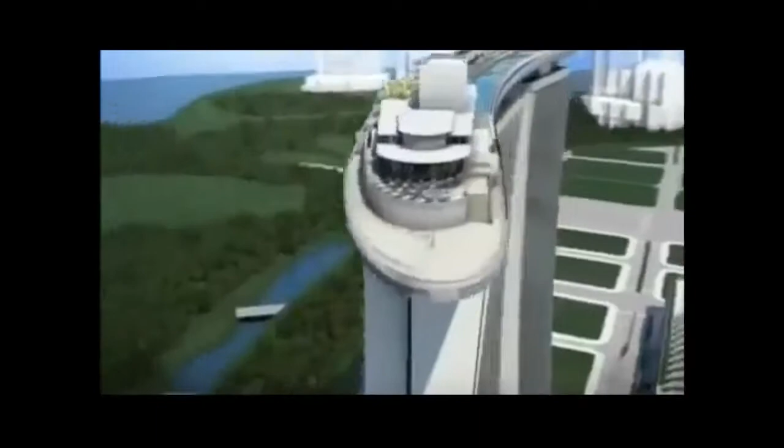Singapore's Marina Bay Sands is one of the world's most complicated construction projects. Engineers have to build not one, but 3 skyscrapers that will shoulder a sky park as big as an aircraft carrier. Worst case scenario, we get stuck. They have to devise ingenious solutions to assemble a 60-meter tall museum of impractical dimensions, install giant artworks, and erect seemingly floating pavilions for shopping and entertainment. If engineers succeed, they will create a virtual city unto itself.

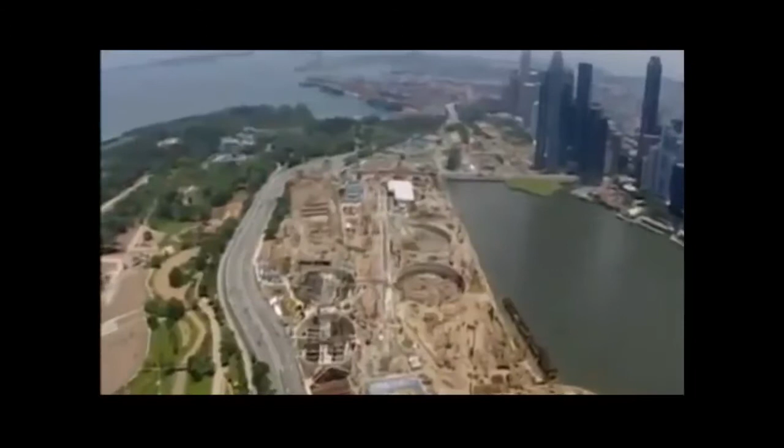Singapore, the Southeast Asian country, is smaller than New York City. The lack of space forces it to build its largest leisure and entertainment hub to date on a small tract of reclaimed waterfront land. The Marina Bay Sands. It's not one megastructure, but many.

Serious challenges lie in the array of buildings that form the unique complex. 3 55-story hotel towers slope at such great angles, they're in danger of buckling under their own weight. An even bigger problem is the hotel's roof. A 340-meter sky park spans its length, containing gardens, outdoor pools, and the world's largest cantilevered observation deck. But how do you build something as big as an aircraft carrier, 200 meters in the air?

In the hotel's atrium, mammoth works of art have to be somehow incorporated into the architecture. Its challenging centerpiece, a 15-ton mass of steel by a renegade artist from Britain.

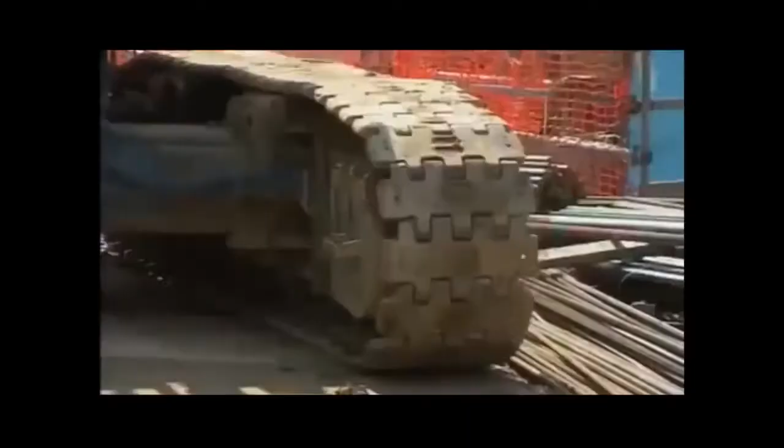A 60-meter tall art science museum is designed for maximum visual impact. It will be to Singapore what the Opera House is to Sydney. Only one problem: it seems too impractical to construct.

And a set of dramatic glass-encased pavilions, while themselves pose little challenge, have to be built in water.

The man behind the Marina Bay project understands the risks, but he believes that anything short of astounding will fail. Sheldon Adelson, one of the world's richest men and CEO of Las Vegas Sands Corporation. What we hope to accomplish is to change the face of Singapore tourism. So we expect a very successful development.

That is by far the largest and most expensive single project we've ever undertaken. It'll cost about 5 to 5.5 billion US dollars. It's a lot of money. Now, I know $1 billion doesn't buy what it used to, but by any measurement, it's a lot of money today.

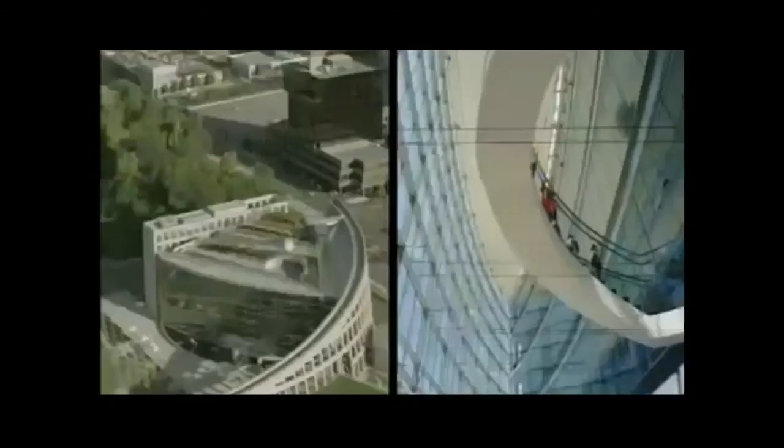Adelson believes his huge investment is safe in the hands of Moshe Safdie, a world-renowned architect. Safdie is recognized for his use of dramatic curves and geometric patterns. The Marina Bay complex will be his largest and most difficult project yet.

I think that architecture has to be timeless. Therefore, what it espouses, what it provides, needs to be something that has a long life. What's unique about Marina Bay is all the pieces coming together. You can't think about it as individual buildings. You've got to think about it as a piece of city. It's much more a symphony than it is a sonata.

On the ground, engineers are more concerned about the reality of building Safdie's vision. This is the North Retail section area. 30-year veteran John Downs is in charge of overseeing the entire project. The design is very, very diverse, and each component of the project is totally different from the others.

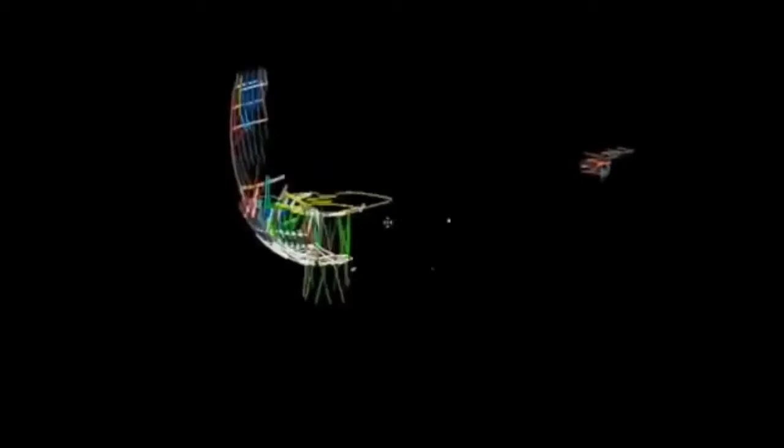For a project of this size, you'd expect with the planning, with the design, with the construction, you'd be expecting somewhere between 6 to 7 years. Here is basically a 3-year turnaround.

The first and most critical construction task is to secure the footprint, though this normally straightforward job proves otherwise, since the site was originally allocated for boats. The complex sits on 560,000 square meters of reclaimed land, part of a decade-long plan to revamp Marina Bay, a former saltwater estuary that's now a freshwater reservoir.

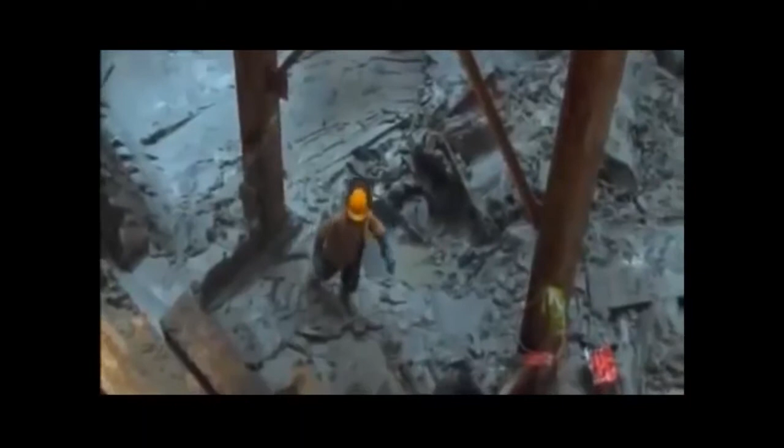Beneath the reclaimed land, which is essentially a seabed, is a dangerous layer of marine clay. Sometimes called black toothpaste, marine clay has very poor structural properties. If not given complete respect, the unstable marine clay is potentially fatal.

In 2004, Singaporeans discovered the lethal consequences firsthand. A routine excavation in an underground tunnel for the mass rapid transit network causes a collapse, creating a gaping hole in the Nicoll Highway, killing 4 workers.

The ground conditions in which they were building the Nicoll Highway were not dissimilar to those in which we are encountering here. They had also soft clay, they had similar depths of excavation between 20 and 37 meters. One of the big things that was learnt in the Nicoll Highway collapse was the importance of monitoring movements and the control of quality as the construction proceeds.

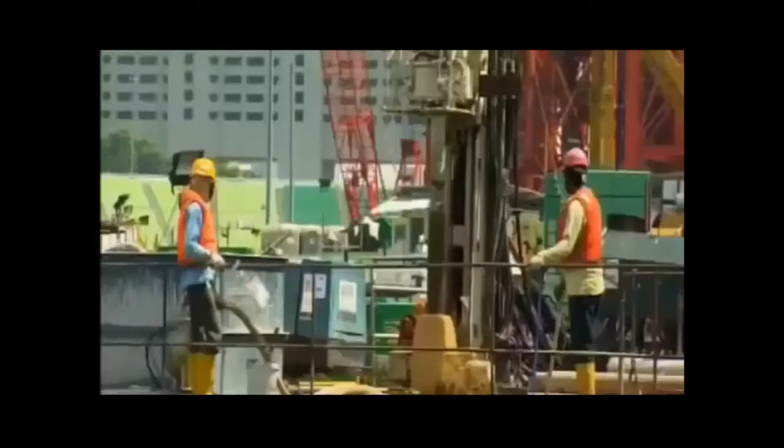Marine clay is an old foe of engineer Mike Barton. He's defeated it in the past by understanding how it behaves. The big problem with marine clay is that it is so soft that when you dig out the inside, the walls will move and potentially collapse and allow all the surrounding water in the bay into the excavation. So, before work can begin, the unstable building site needs major fortification.

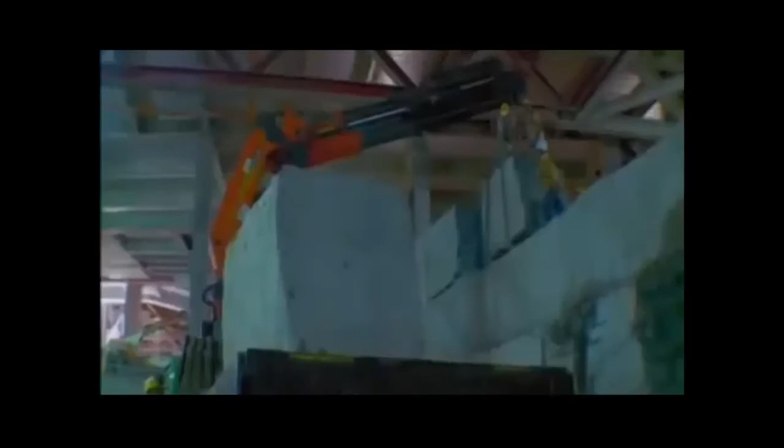To combat marine clay, engineers decide to build giant concrete walls to create stabilizing perimeters for the larger buildings, known as diaphragm walls. Up to 1.5 meters thick, diaphragm walls are steel-reinforced concrete sections, pounded 50 meters into the ground. They form watertight enclosures for men and machines to work round the clock.

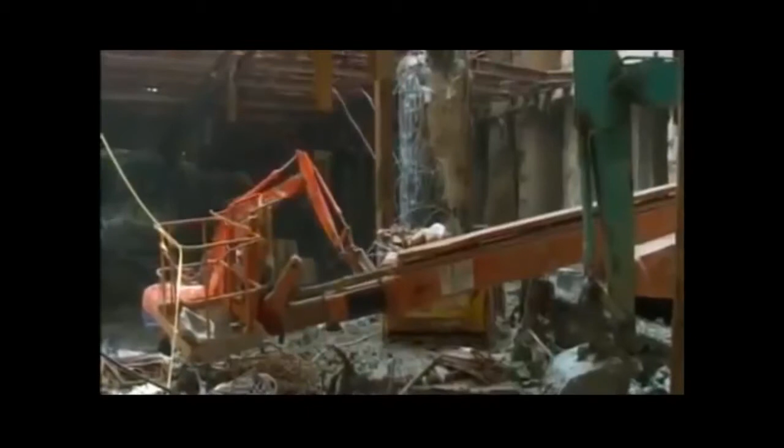In just 1 year, over 4,000 meters of diaphragm walls help produce a rock-solid foundation.

The diaphragm walls that we constructed in a formation which we called a peanut formation, which is 2 circles joined together, and a donut formation, which is circular, are able to withstand very, very large forces from the marine clay without any movement. They encapsulate an area that's bigger than a football pitch that enables us to excavate very quickly and to build structure up very quickly.

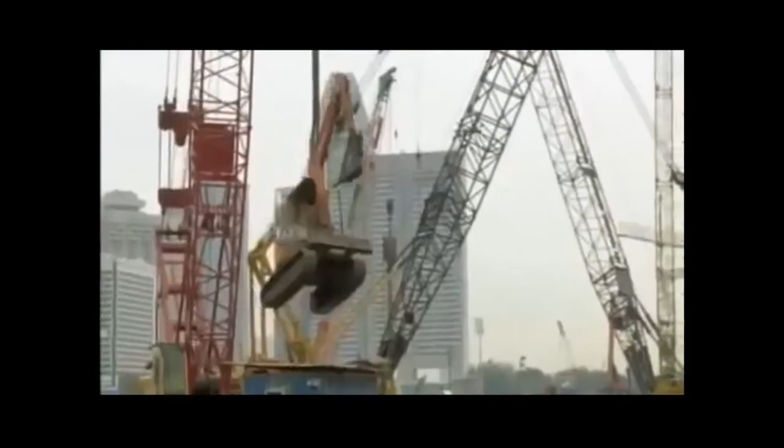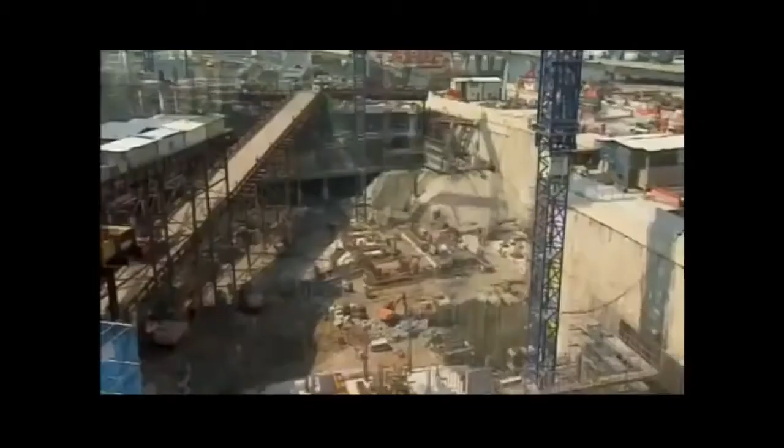Securing the footprint of the Marina Bay project has already taken a year out of John Downes' schedule. He now faces the difficult task of erecting the resort's many buildings in a space of just 2 years. Just managing the whole logistics of that, including the construction methodology, is very, very challenging for us.

To meet his tight deadline, Downes chooses the most direct solution. He hires 16,500 workers to construct every single building, simultaneously.

It's like leading a small army, so organizational excellence is key. We're just on the edge of Singapore in the CBD here. So rather than lose the contractors and the workforce to go off-site, we built our own 3-story project office. We have all of our contractors, our subcontractors here. We house our resident site staff. We have our project management team. We have our construction management team, our design management team, and the logistics here.

Come lunchtime, the monster workforce creates another massive challenge for Downes. He responds by building one of the world's largest site canteens. We've got 13, 14 different food styles here. You can see by my shape and size that I eat here every day.

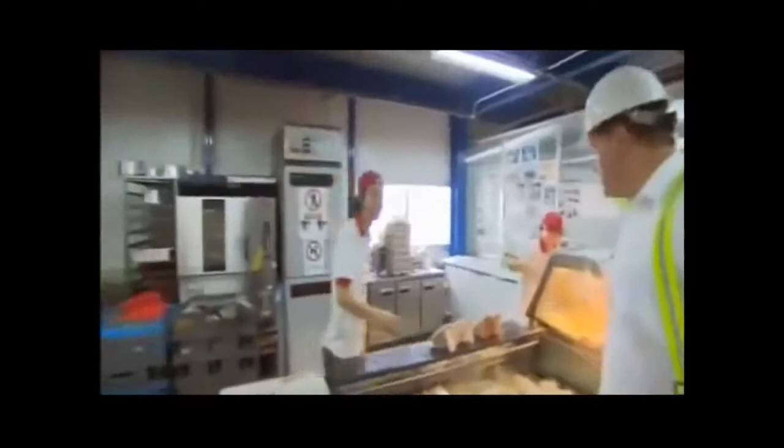I enjoy this food. So here you can see the project bakery. It has its own ovens. It's set up for breakfast. We cater for sandwiches during the course of the day. Can I take a sausage roll, please? So, freshly cooked food, straight from the oven. We stand by our products.

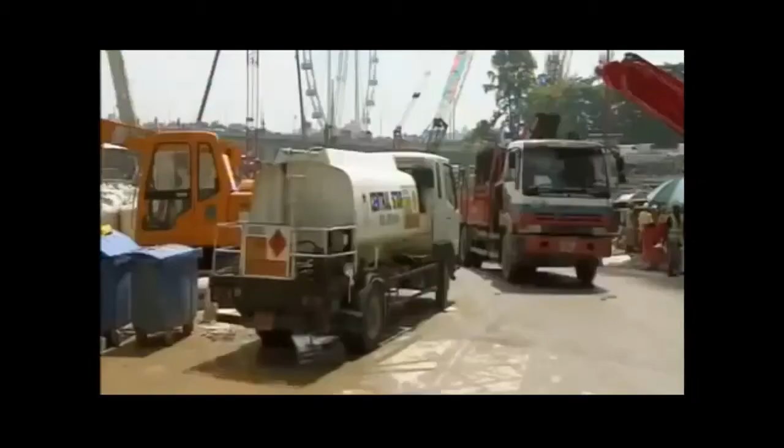The tight schedule also creates problems at the hotel towers, where engineers are already struggling with a congested site. The important thing to do is to make sure that they come in and deliver the goods straight away and then get out again. We don't want too many vehicles on site at the same time.

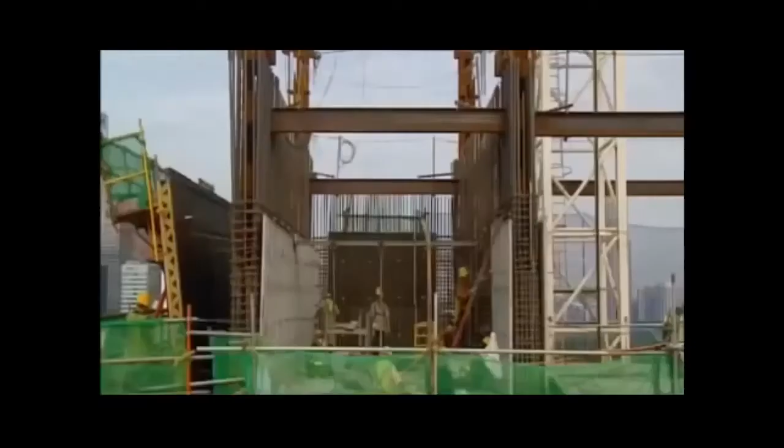To speed up construction and alleviate traffic congestion, engineers turn to a method that's proven itself countless times in the field: precast concrete. Hotel walls are made off site in the thousands. And workers laying the floors are so proficient, they produce 1 floor per 4-day cycle.

It's an impressive display for a conventional solution. But the structure they're attempting is anything but conventional. The key challenge of building the hotel towers is its unusual design. Unlike other skyscrapers, part of the towers slope at incredible inclines. Like a set of collapsing dominoes, the towers could buckle under their own weight if a practical building solution is not found.

It's a major concern for engineer Craig Glover. I've been in the industry for 25 years, done a wide range of projects in many different countries, but nothing compares to this whatsoever. There was nothing we could take reference from across the street, on the next high rise, or across town. This is a new frontier.

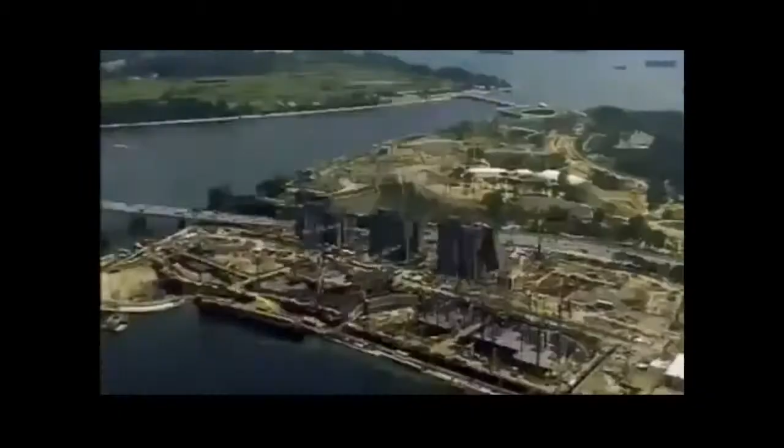Costing a staggering $5.5 billion to build, the Marina Bay Sands could be one of the world's most expensive mistakes if engineers can't solve the tower's problematic structure.

Engineer V.C. Cheong leads the design team, and their solution comes out of left field. If you look at the configuration, it's not a straight tower. It's with a sloping leg. So all this sloping leg actually is, inducing a very huge external force onto the structure. We kind of built it without any support. So we actually formulate a solution to prop up the sloping leg.

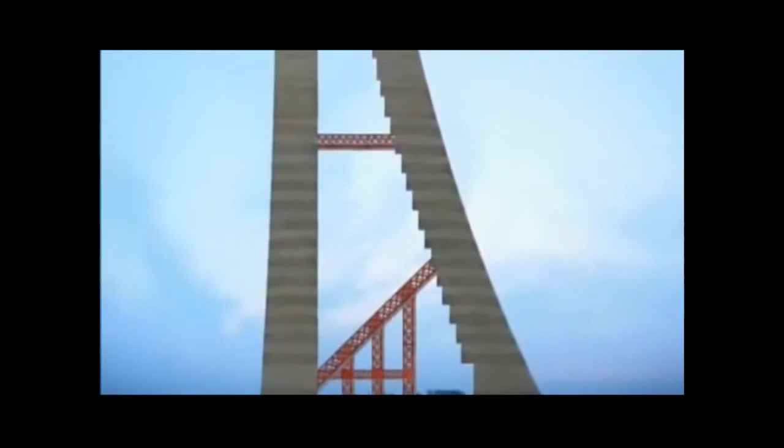Using a technique they've never employed before, engineers build large temporary struts made of strong structural steel. They prop up the sloping towers as they rise.

Like a suspension bridge, high tensile steel tendons, also known as tension cables, give an added layer of support inside the walls. In theory, both the struts and the tension cables are temporary and will be removed once giant link trusses connect the towers at the 23rd floor.

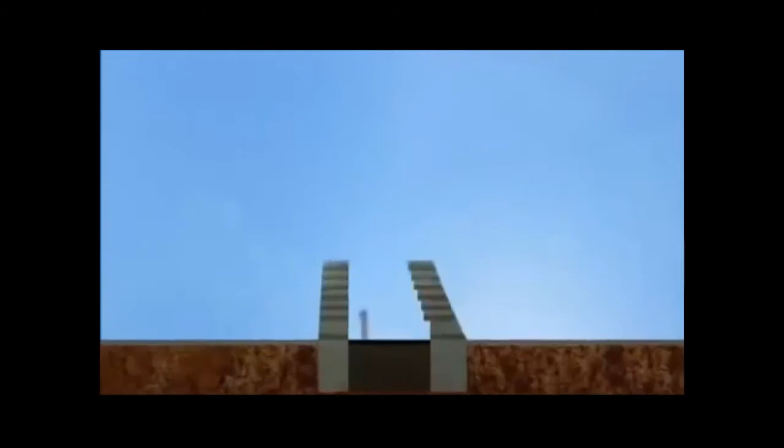The sheer weight in concrete is enough to topple the towers at level 8 if the engineer's calculations are wrong. To reduce the chances of failure, Glover and his team make a radical decision. Instead of removing the temporary tension cables in the tower walls, they make them permanent supports. I feel good it's in there because it's added strength, it's added support.

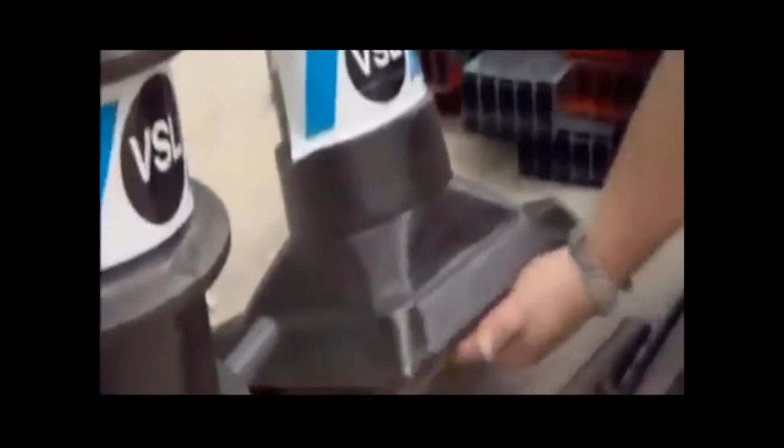We have a twined network here of high-strength steel, and what we do is we bundle these up so they form a cord with multiple strands inside this conduit. We place this conduit inside the walls prior to casting the concrete. Once the concrete is cast, we anchor one end into the concrete. We then put a very high-strength hydraulic jack onto the collar and one by one pull these strands through and tension them up. What that does is basically pull the building back and hold it in place.

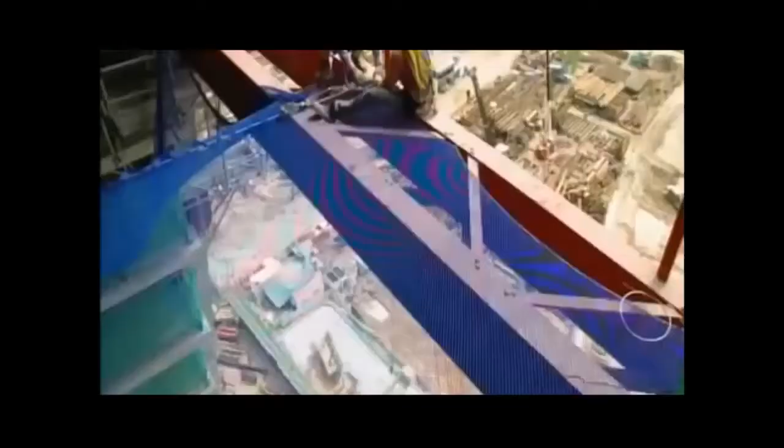If these cables were to suddenly break or if they weren't in place, we wouldn't be able to control the self-weight as we build more and more of the building up. So it's a very important part of the actual engineering of the solution to hold the building in place until we can connect it. Despite the team's quick thinking, the true test of their engineering decisions will only happen once the main support struts are removed and the massive link trusses installed.

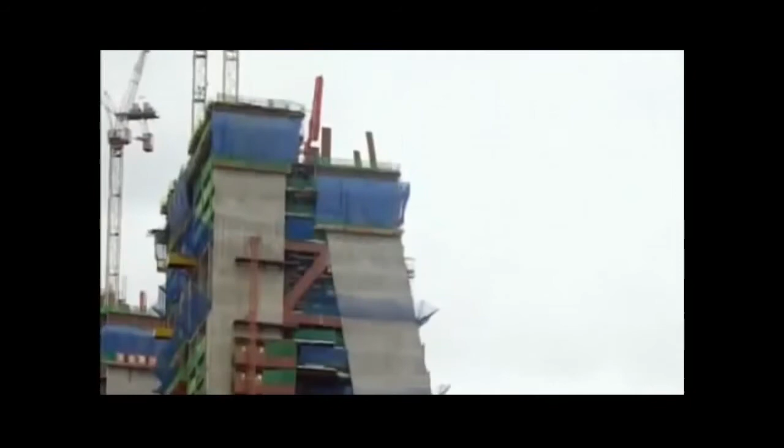Link trusses are huge reinforced steel brackets that bind the towers at the 23rd floor. Once their installation is complete, they transfer the sloping tower's weight completely away from its temporary struts. Once we're satisfied that we don't have any stability issues, then we can bring the large hydraulic cranes in and member by member start to dismantle the struts. It's got a lot of time pressure, so we've just got to make sure that these things keep moving. It's done its job holding up the building, now it's holding up the job.

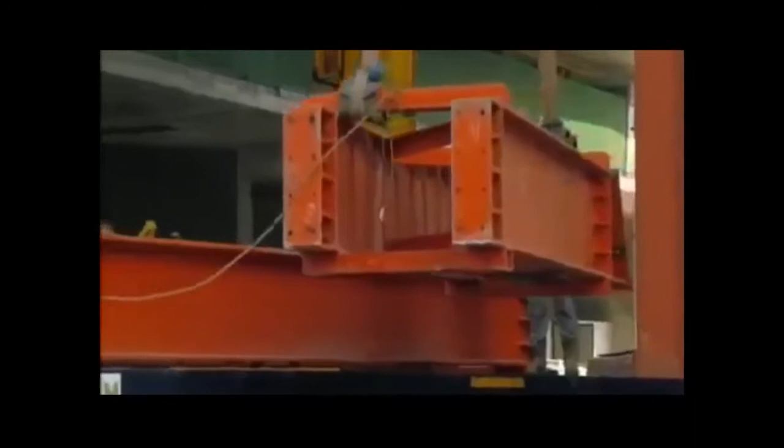As the last pieces of support struts leave the site, Glover and his team can finally breathe a sigh of relief. The link trusses are holding the building load. So far, so good. It's a lot of theory, a lot of calculations, but until you really do it and really get it out of the building, you never quite know. I'm always waiting for the phone call in the middle of the night that something's gone wrong.

Not all the structures have ended up according to plan. The 60-meter-high Art Science Museum is facing a major design overhaul. Planned as a venue for blockbuster exhibitions on the arts and sciences, its bowl-shaped roof doubles as a 3,000-seat amphitheater. Unfortunately for engineers eager to start its construction, architect Moshe Safdie isn't happy with its current shape. Somebody looked at them and said, looks like a bunch of bananas. In fact, Mr. Adelson said, looks like a bunch of bananas. I said, well, if they look like a bunch of bananas, we're not there yet. And do the structural engineers have a preference?

It's terrible news for Safdie's design team, especially its principal, Gene Dyer. There are times that Moshe will come in with an idea. We think it's quite exciting. We'll pursue the idea for weeks or even months. He'll come back and say, I want to change the idea. And we've already bought into the idea, so it's a bit frustrating.

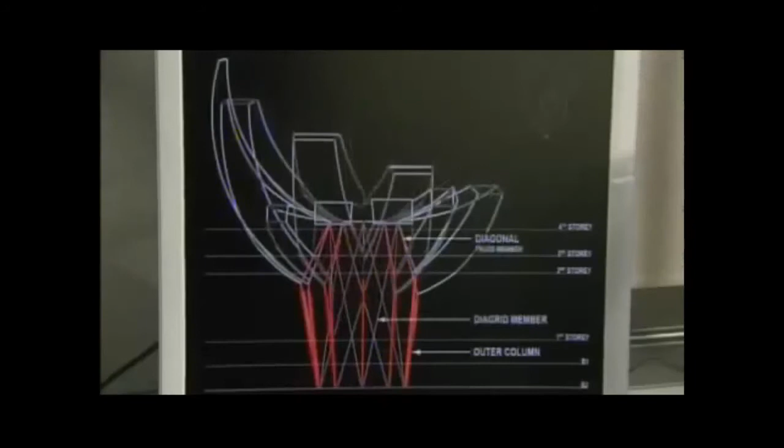To rework the unique geometry and dimensions of the Art Science Museum, Safdie and his team turned to advanced 3D modeling programs. It not only makes navigating the museum's complex geometric patterns easier, it shortens the process to a matter of days. The model is dynamic and it can be moved by just changing one or two elements. Moshe could experiment. He could make rapid judgments in a very short period of time about which way he wanted to take the project. This is a process that was impossible to do 10 years ago. Without the computer, this would take years and years.

Nautilus form effectively became... To rationalize the new look into a buildable structure, architect David Robbins splits the museum into spheroid segments. We began to look at using different spheroids to define the different upper and lower surfaces of this building. That gave us a very rational way of describing the plan form to our clients.

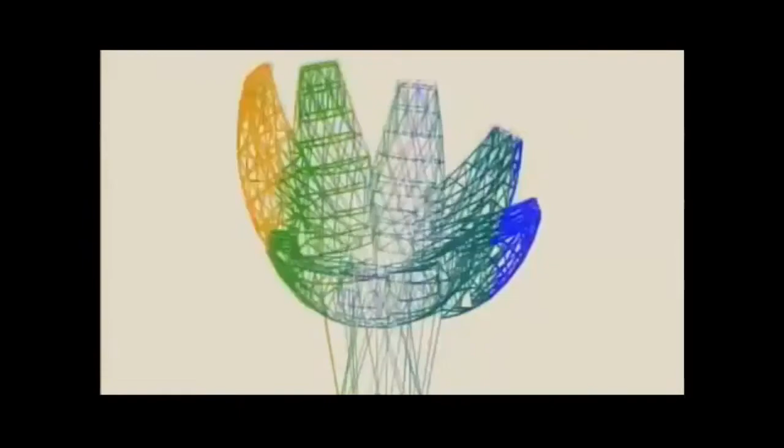After months of refining the design, Safdie is finally happy with the result. The mathematical precision that we gave them made them even more beautiful. It led some people to say, well, hand of welcome. Others said, is that a lotus? And the more ambiguous the associations, the closer I thought we were getting to our target. Because I think the least exciting buildings are those which have overt symbolic associations.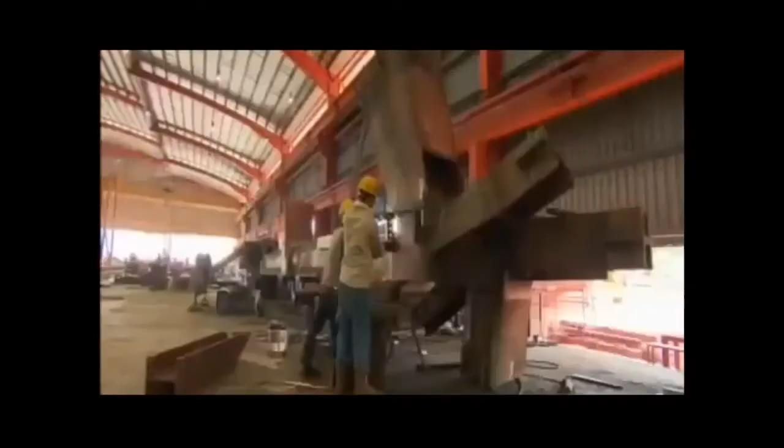Armed with the new design, engineers begin work on the museum's 60-meter-high superstructure. A staggering 5,600 steel elements, weighing some 5,200 tons, are prefabricated to exact specifications. They are then trucked onto site and assembled. It's like putting together a giant jigsaw puzzle. Each element has to be installed with pinpoint accuracy. If it's even a few millimeters off, engineers will have to start from scratch. Engineers of the massive atrium at the base of the towers are facing an equally tough construction process.

Safdie has come up with a challenging design. He wants to inject art into the atrium's architecture, so that visitors will feel like they're walking through a grand Gothic cathedral.

In medieval times, if you think of a Gothic cathedral, there's the architecture, there's the stained glass windows, there's the sculptures on the pinnacles. You cannot draw a line and say art and architecture. Art and architecture are one, they're singular experiences. And I think what we try to do here is come back to this integrative mode.

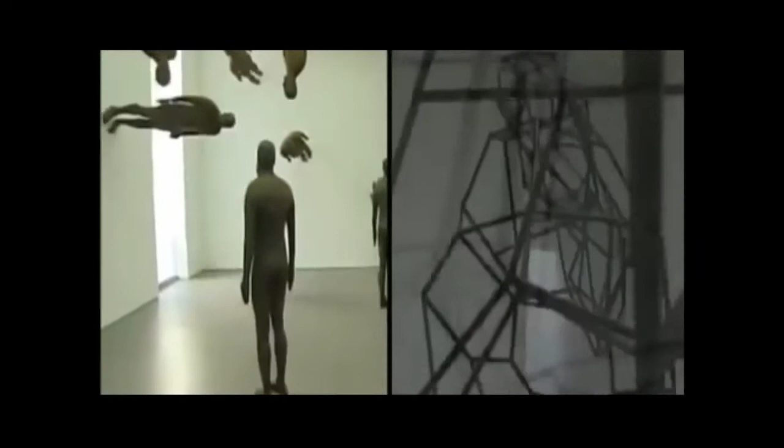To create the centerpiece of his vision for the atrium, Safdie commissions renowned British sculptor Antony Gormley. Famous for his unusual approach to art, Gormley is the brains behind the Angel of the North sculpture in northern England. What he's about to attempt is proving to be more of a construction challenge than an artistic one.

A cloud-like sculpture some 40 meters long, made up of 15 tons of high-grade stainless steel, hung 12 stories above the atrium. The Angel of the North is, in a way, making a very traditional public sculpture because it's isolated in space at the edge of a valley. You can see it for miles and miles. It's very much about occupying space.

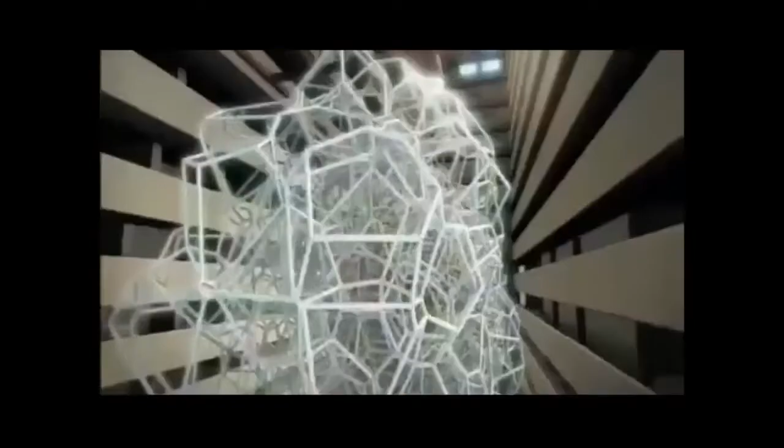This is about activating space. You can't see it for miles and miles. You have to be in the space with it. Each viewer, every person coming out of their hotel room will confront this big chaos thing and have to find their place in it. I think that's an exciting thing.

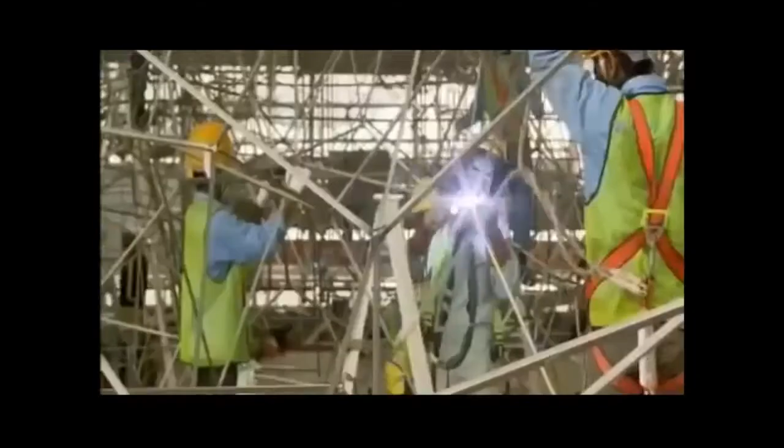Called Drift, Gormley's steel sculpture is so huge and so complex that it can't be sculpted using traditional methods. Gormley's team has to create state-of-the-art 3D computer programs that translate his ideas into buildable plans. But just as they're about to begin construction, a bombshell drops.

September 2008, a global financial crisis wreaks havoc on markets. The flow of the hundreds of millions of dollars that keep the Marina Bay project going every month suddenly stops. For engineer Matthew Pryor, it's a massive blow. I feel devastated. I mean, it couldn't be worse. Probably the worst day of my life professionally.

There's no more money coming through. So unless we put some funding in place or there's something, we're going to have to shut the jobs down. But there's a tough decision to be made, and we don't know what we're going to do just at this point in time. With the future of the multi-billion-dollar project plunged into doubt, all eyes turn to the man behind it, Sheldon Adelson. The next move of one of the world's richest men will determine the fate of the mega construction site.

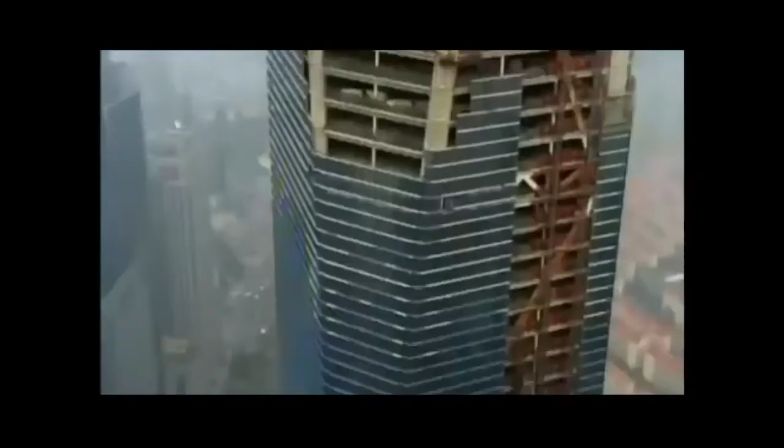The 2008 global financial meltdown is a haunting echo of the 1990s Asian crisis. Back then, progress on Shanghai's World Financial Center came to a complete halt for 5 years. For Adelson, that's simply not an option for the high-profile Marina Bay resort. His vision of changing the face of Singapore tourism is at stake. And so are billions of dollars of investment from his Las Vegas Sands Corporation.

He prefers finding a stopgap solution to weather the storm. Throughout history, there has never been a trend that went straight up, nor a trend that went straight down. So it goes up and down. It's only a matter of time when things will recover. In a bold move, Adelson pledges his vast personal wealth to the completion of the project, effectively ending any speculation of failure.

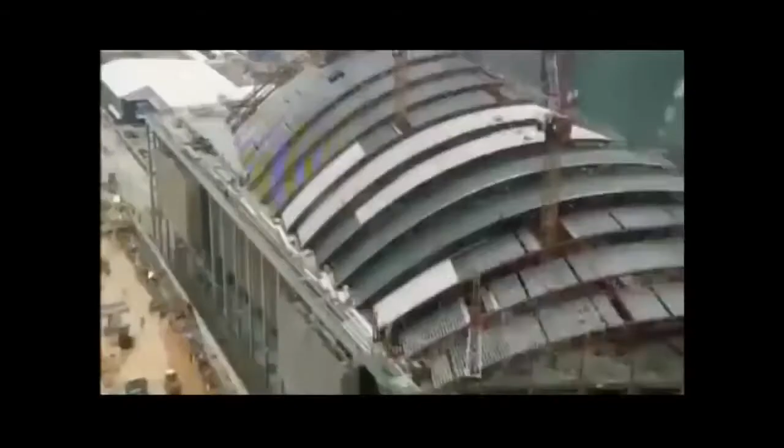There's a massive sense of relief in the company. I mean, everyone pleasantly surprised how quickly we've got through this and the fact we could hold it together and get it going again. So euphoria is probably the best way to describe it. With the crisis averted, construction on the three 55-story hotel towers, the casino, theatres and convention centre resumes at pace.

Everywhere you turn, steel is being installed. It's vital reinforcement for every concrete structure on the 15.5-hectare site. For one project at the tower's atrium, steel is more than just reinforcement. To construct the 15-ton Drift sculpture by British artist Antony Gormley, engineers had to first laboriously prefabricate it into over 70 segments.

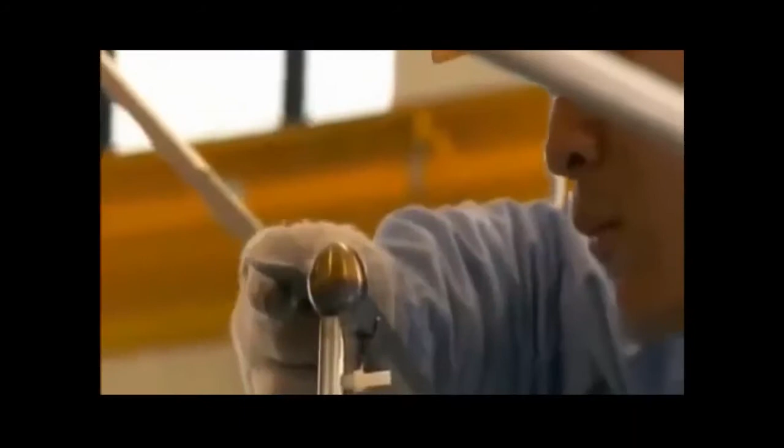The segments are then welded into 8 slices and will ultimately form the sculpture. It's a tricky operation, but engineers are able to complete it swiftly due to a system of codes and numbers that enable them to quickly identify what goes where. Once all 8 slices of Drift are fully assembled, it's lifted up into position by a temporary lifting frame. A massive box truss on the atrium ceiling then takes over the load.

In theory, the box truss will support the weight of the lifting frame as it's being lowered down. It will be a heart-stopping moment, especially for engineer Graham Stevenson. The lifting frame is about 9.5 tons, so when it picks up and gets some momentum, there's a potential that it just wants to flick over and rotate through its full 90 degrees, and we won't have it under control.

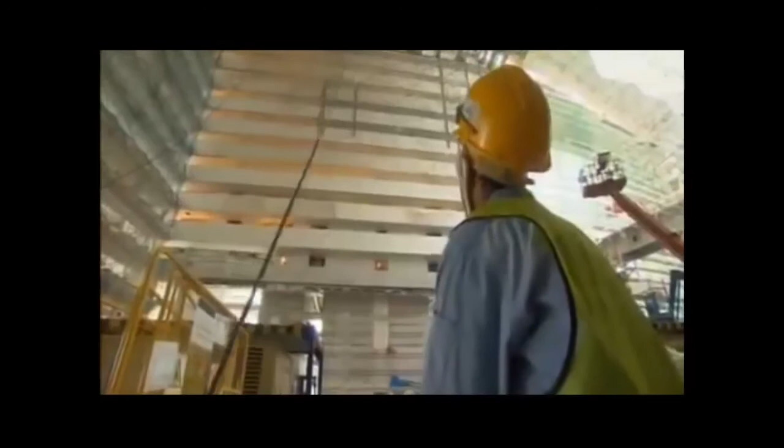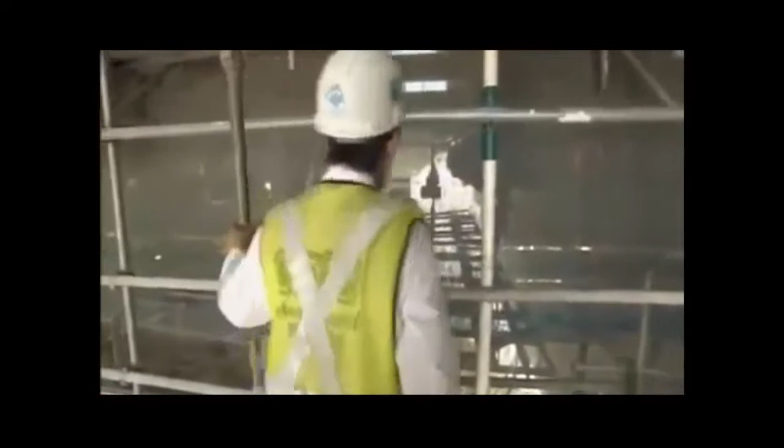Stevenson's solution: 4 powerful automated hoisting drums located at the 4 corners of the frame. They allow workers to control the strength and speed of the operation with high tensile steel cables. A spotter at the top determines the pace of the procedure and marshals the team.

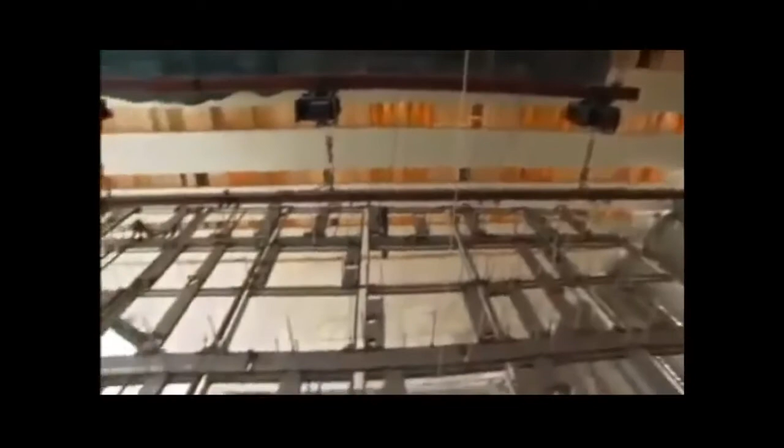With their preparations complete, it's time to face the moment of truth. Sculptor Antony Gormley is as anxious as any of the team. The entire operation is estimated to take up to 10 hours to complete. As soon as the frame is in motion, there's no turning back. Midway through the lift, Stevenson receives reports of a potential problem.

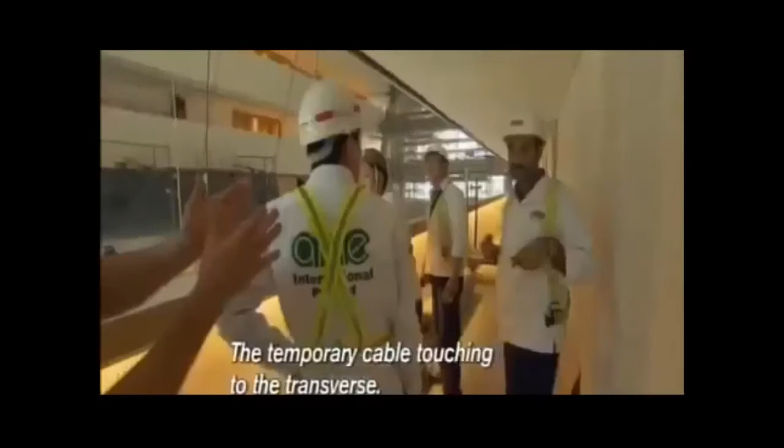22 story, number 7 temporary cable, scaffolding touching the cable. Why you got the temporary cable touching to the transverse? Yeah, but is it just the end of a tube? Yeah. So you can just cut the tube? Yeah. Problem solved.

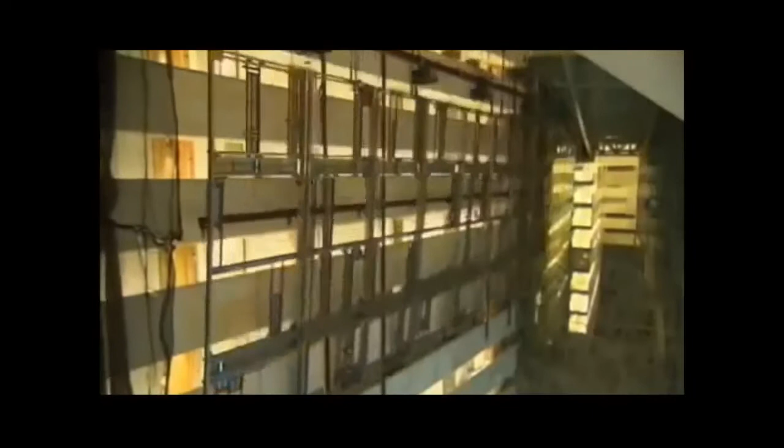But what was previously an estimated 10-hour procedure now turns out to be a 24-hour marathon lift. At 6 a.m. the following morning, they complete the job. Absolutely fantastic. The Gormley is now finally in its final position, so really an end of a long and exhausting day, and big thanks to everybody, but it's finally done.

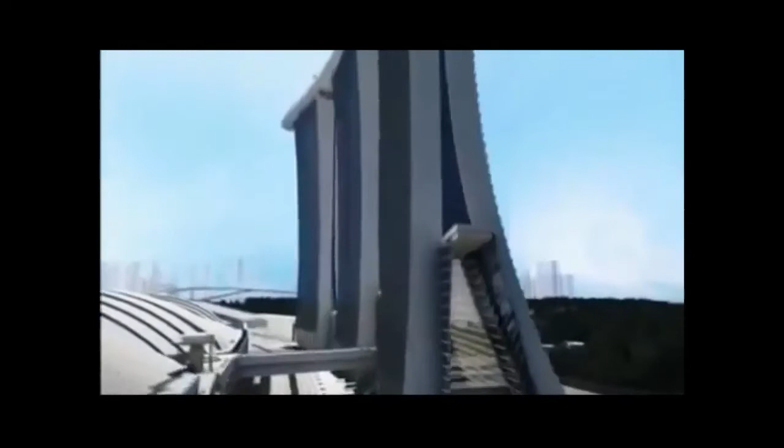While the Drift settles into its new home at the hotel atrium, elsewhere attention is focused on one of the project's key features, the Crystal Pavilions. The two glass-encased buildings by the promenade are set to be the resort's premier shopping and entertainment complexes. But before engineers can make them a reality, they have to secure their footprint. And already a major obstacle threatens to sink their objective. The Crystal Pavilions are situated within the confines of Marina Bay. So to found it, engineers have to find a way to build in 6 meters of water.

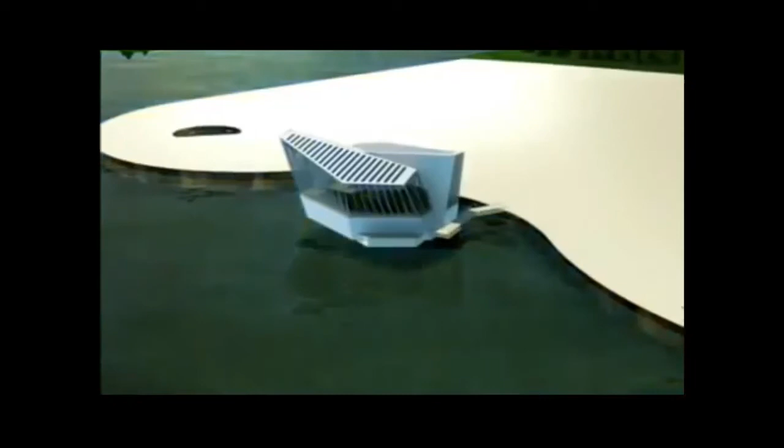The responsibility of tackling the problem falls on the shoulders of engineer Kurt Vella. I'm from Sydney. The underlying foundation in Sydney is sandstone, it's rock. All you need to do is just dust off the surface and you can build skyscrapers on it. Here it's very different. All the structures have to be heavily founded.

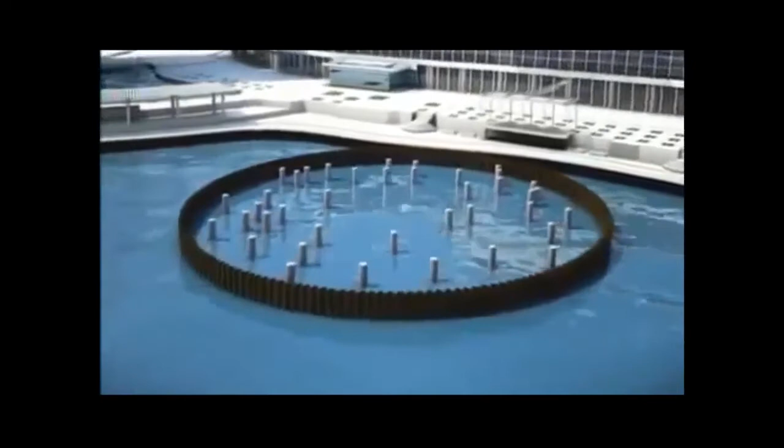To keep water out of the construction site, only one solution seems viable for Vella and his team. A waterproof steel structure called a cofferdam. This temporary formation surrounds the worksite with a circle of steel sheet piles, creating an impenetrable shield that locks out the water, keeping the workers safe within. For the job, they rope in a 12-ton vibro hammer. It punches the sheet piles deep into the earth, making the cofferdam rock solid and resistant to movement.

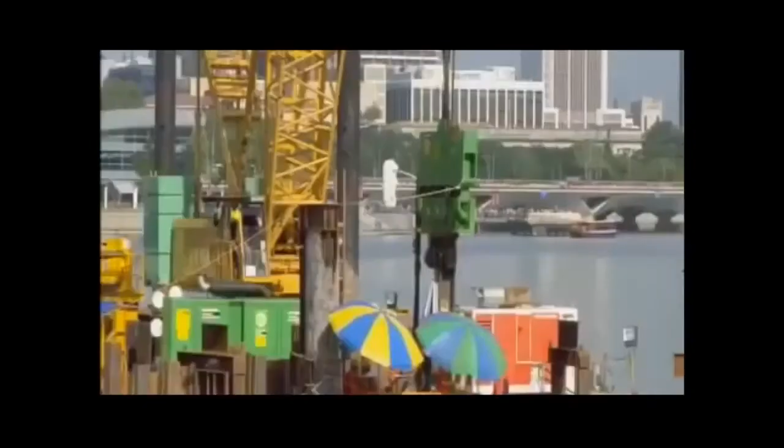With the cofferdam secured, engineers deploy powerful diesel pumps and run them 24 hours a day, ejecting any water that remains within the walls. This last step comes with inherent dangers. The force of the water outside creates what engineers call hydrostatic pressure. In theory, it's powerful enough to force water through any gaps in the cofferdam. It's something that Vella prays will not happen.

There's a bit of hesitancy and concern because we've got to build this building in the middle of Marina Bay. Everybody can see what we're doing, so if it leaks, it's a problem. If it fails, if it moves, if it collapses, it'll be an absolute catastrophe. After a day of pumping, Vella's worst fear comes true. Parts of the cofferdam are leaking.

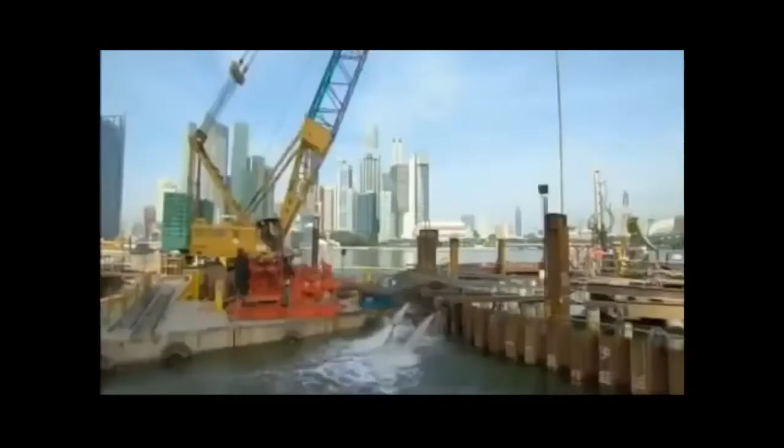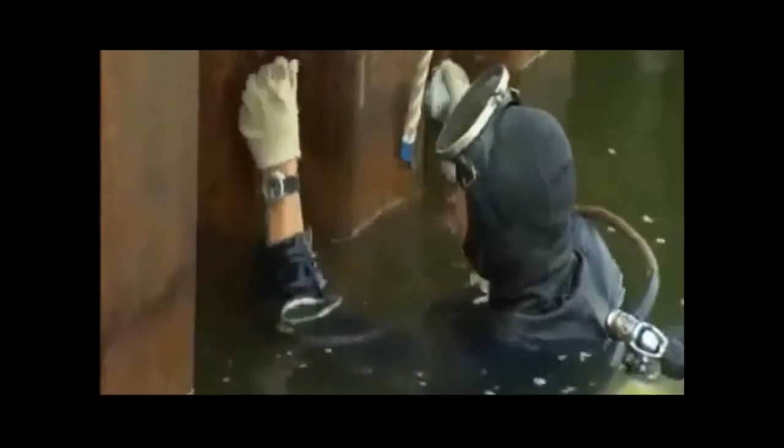To rectify the problem, Vella orders a team of 8 divers into the water on 10-hour shifts. Their mission? Find out where the water is being forced in and plug them shut with epoxy resin. Anson Lee is an 8-year diving veteran. The toughest part of our job is the environment.

The visibility is poor here. It is totally zero, I cannot see anything here below. I solved that by feeling the suction and then feeling out the thing. You have to overcome all the fear that I can't see under the water, but okay lah. I feel proud to be one of this team to build this thing out.

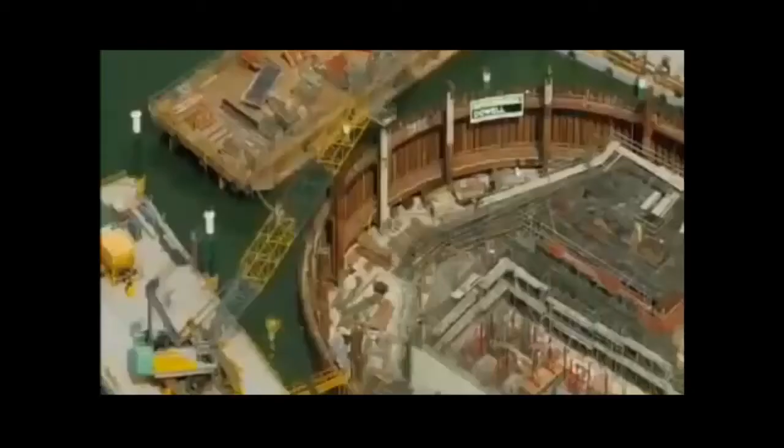After 2 weeks of hard work by divers and the pump crew, the job is finally complete. Kurt Vella can also breathe easy. Every job is different, every job has its challenges. You plan and prepare, you try and identify your risks in advance, and you try and come up with contingency plans. And that's what's really enjoyable from my perspective. That's what gets me out of bed in the morning.

After 2 years of battling the elements and overcoming difficult construction milestones, the 3 sloping towers of Marina Bay Sands can finally celebrate their topping out ceremony and move on to the next phase. But a destructive force of nature threatens to throw a spanner in the works.

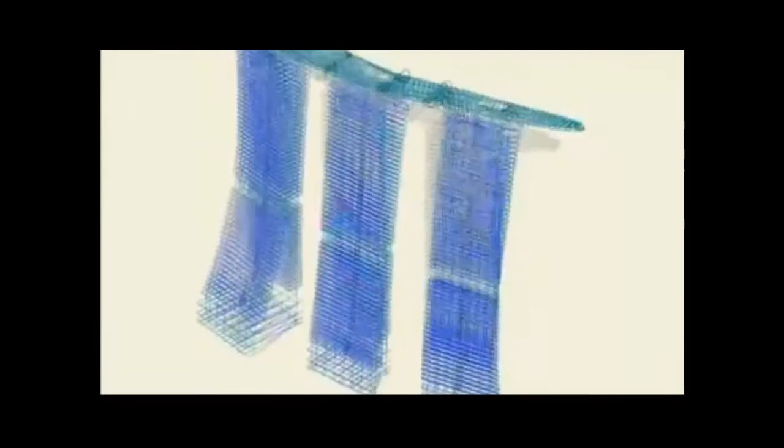With climate change predicted to affect the pattern of Southeast Asia's typhoons, Singapore may one day experience the destructive tropical storms plaguing its northern neighbors in the Philippines and Taiwan. When that happens, typhoon-force winds could spell disaster for the hotel towers, especially the 340-meter sky park sitting on top of it. The force of the wind can make both buildings sway dangerously, causing irreparable damage to the structures.

The Sky Park, offering 360-degree views of Singapore. The visionary design will have enough surface area to park 4.5 Airbus A380s. But when architect Moshe Safdie first mooted it, it stemmed from a purely functional need. Luxury hotels, as we think of them, always have lots of open space around them, gardens, at least in the kind of tradition. But we didn't have much space left.

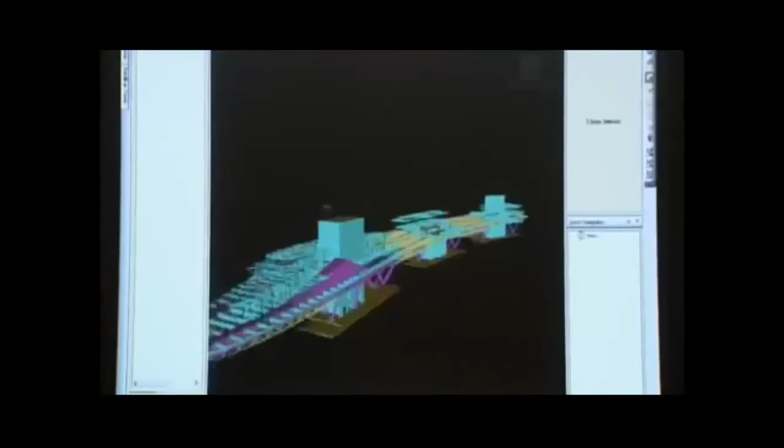Safdie's revolutionary idea scores points for ingenuity, but it clearly isn't what nature intended. Typhoon-force winds threaten to rock the towers and its sky park, causing unimaginable damage. If engineers are to make the building a reality, they'll need a rock-solid solution.

Still got to do all this cladding. Engineer Tony McKee has little time to make things happen. At the moment, we're running a couple of weeks behind what we'd originally planned. We're not entirely happy about it, but at the end of the day, we've got to do this safe and we've got to do it properly. You know, you're safe close to the...

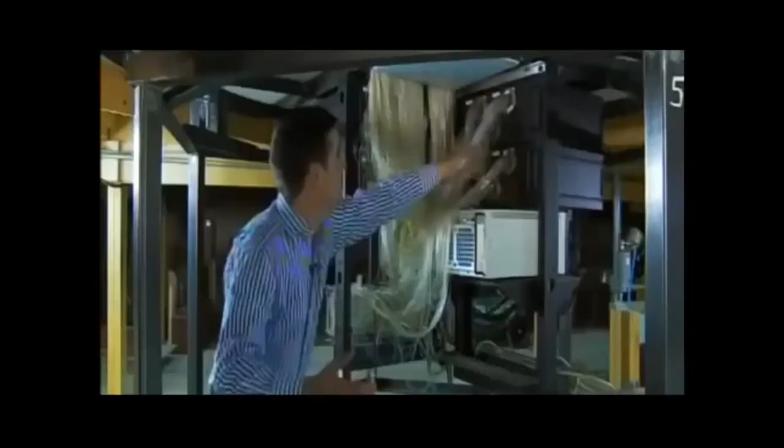To fight the enemy, McKee knows he has to first understand the enemy. He hires leading US wind engineers CPP to carry out extensive testing on the towers and Sky Park. Their mission? Find out how Singapore's potential wind forces affect the buildings. And we turn that upside down. Wind engineer Roy Denoon oversees the process at their state-of-the-art wind tunnel in Fort Collins, Colorado.

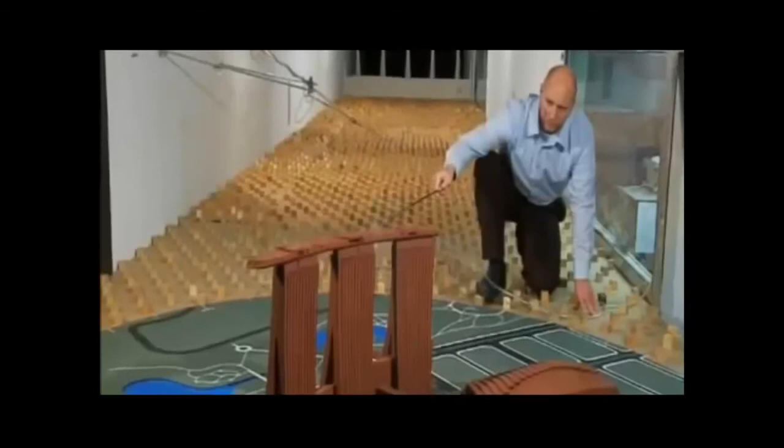The thing that makes this really special is the fact that we have this sky park running across the top, linking all the towers together. So whereas normally with a normal tower, we'd measure the loads on the tower in isolation, with this one, what we're needing to do is to measure the loads on all 3 of the towers at exactly the same time. So that way we can know how the towers are going to move relative to each other, so we can make sure that they're not going to put excessive strains or movements into the sky park.

During the tests, a scale model of the Marina Bay Sands towers is blasted with 40km/h winds to simulate faster typhoon winds in reality. Over 1,000 pressure measuring instruments inside the model register how the winds affect the buildings. At the end of the tests, engineers confirm that the 3 towers can deform by some 200 millimeters during the fiercest storm.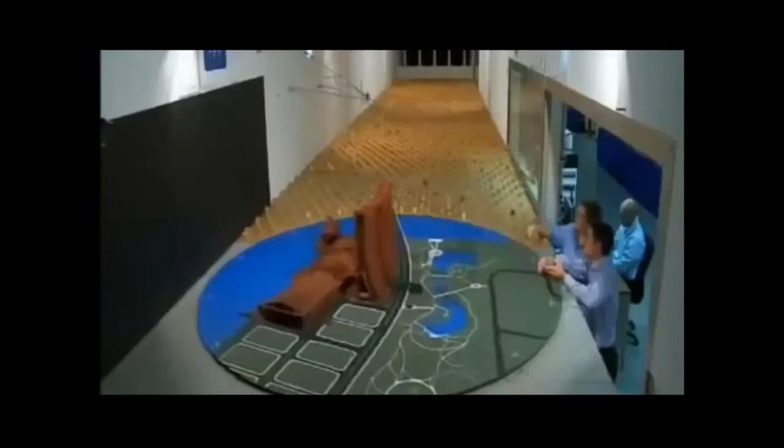Engineers quickly figure out a solution: movement joints. Inspired by bridge engineering philosophy, movement joints are essentially gaps located between the concrete towers. The huge gaps allow for movements of up to 250 millimeters. Aluminium and stainless steel plates act as sliding components.

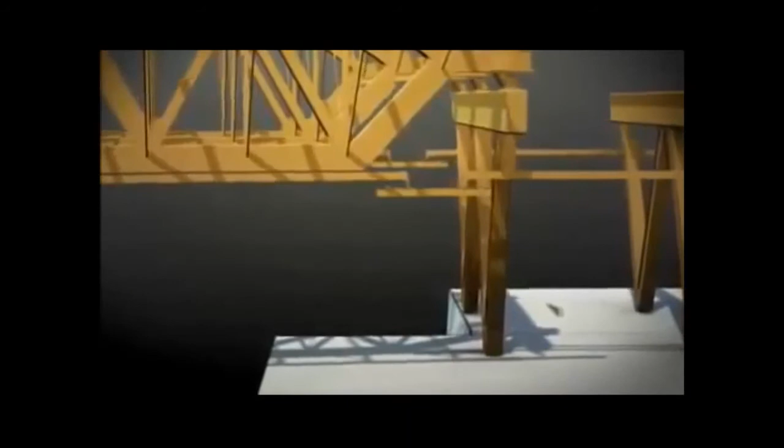They can move back and forward over each other, a little bit like you'd see in a flexible bus, where you have that articulation happening in the middle. It's a similar concept to that. To accommodate the differing movements of the three towers, engineers install multi-directional steel bearings below the Sky Park. The solution scores major points with Tony McKee.

Only one problem. It won't work with a rigid structure containing 1.5 million litres of water. Any movement in the joints could fracture the Sky Park swimming pool, endangering lives and property below. With the help of US pool builders Natare, McKee quickly develops a solution, but it's completely unproven. A secondary system of movement joints built into the pool itself.

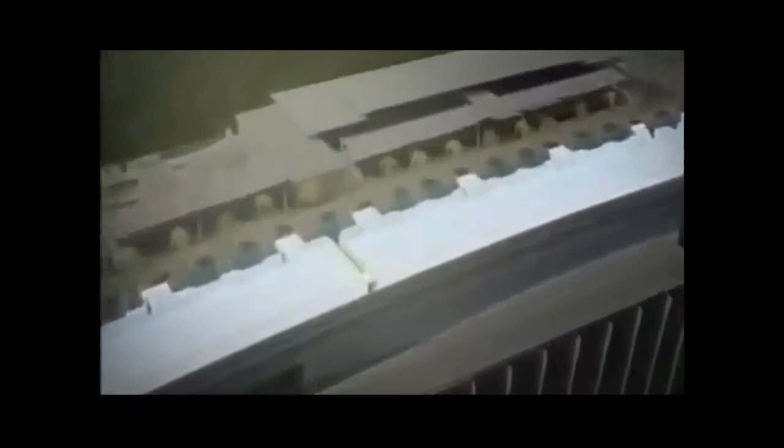The plan: to split the pool into 3 smaller 50-meter units. Steel top hats then conceal the gaps. Huge basins catch any runoff pushed up by the moving pools. McKee knows he only has one chance at making this work. So he commissions a trial by water.

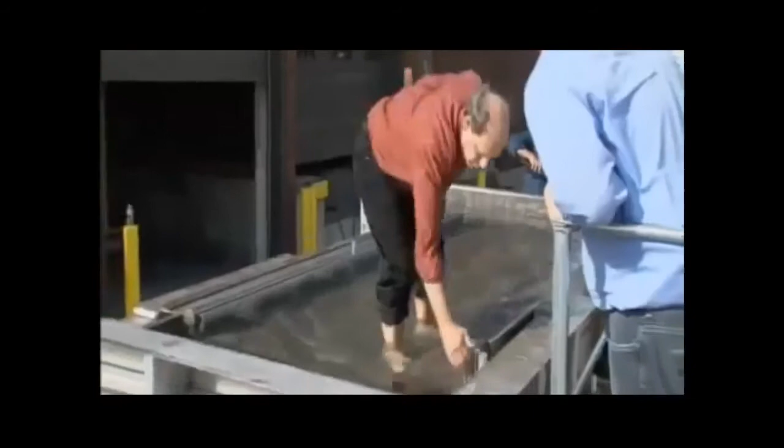What we've got here is the side of the swimming pool, which replicates the movement that we're going to get between the towers. And what the Natare guys have come up with here is a simple track system which can be pushed back and forward by a forklift. And that replicates the full range of motion that we have on the swimming pools, which can be 0 to 250 millimeters either way.

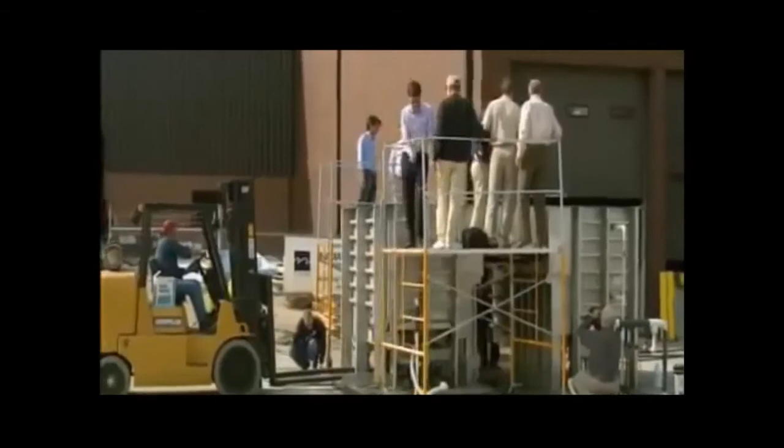It takes engineers weeks of testing before they're completely satisfied. Armed with the final results, McKee can now safely begin construction of the Sky Park. Consisting of some 10,000 tons of steel, the Sky Park is as big as an aircraft carrier. The most practical way for engineers to construct it is to break it into 14 segments on the ground before assembling it at the top of the towers.

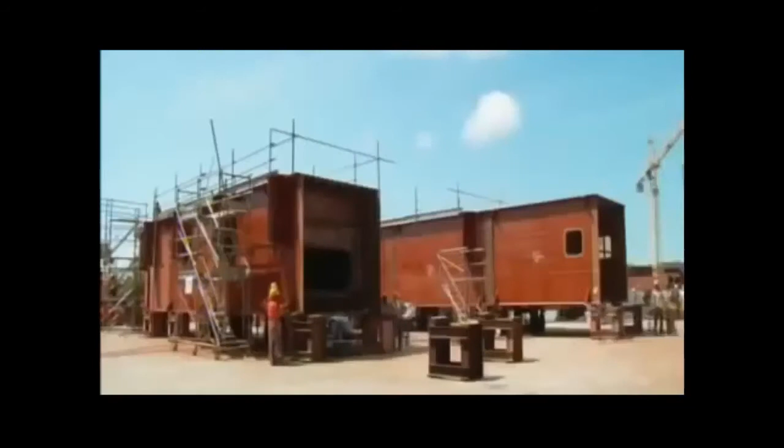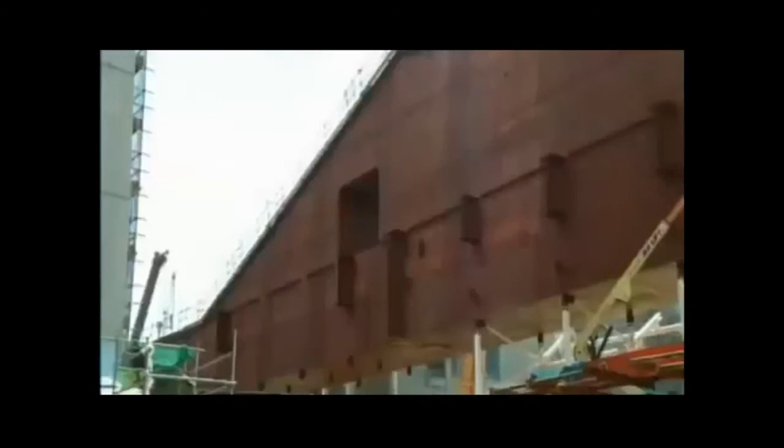There's no room for miscalculation at 200 meters in the air. Each segment is carefully prefabricated and tested by steel specialists Yongnam, and then trucked to the site independently. From the very beginning, McKee and his team anticipate that their biggest challenge will be lifting the 2 largest segments of the Sky Park, the box girders. Measuring 80 meters long, their combined weight is a staggering 1,400 tons.

How do we feel? A little bit of apprehension. You know, it's a significant lift that hasn't been done before. If something goes wrong, it could be really significant for us. To reduce risks, McKee turns once again to proven bridge building technology. In a process known as strand jacking, giant temporary lifting gantries made of strong structural steel will use powerful hydraulic jacks to lift the box girders up to the top of the towers before sliding them into place.

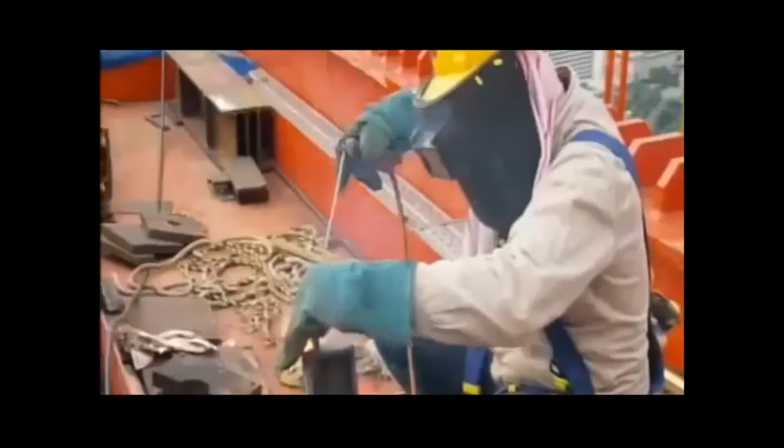It will be the longest and largest lift of its kind in the world, and McKee needs the best in the business. He puts a pioneer in the field in charge: Swiss-French company VSL. Engineer Eddie King and his team have successfully raised bridges, stadium roofs, and even Ferris wheels.

The toughest part of my work is you have to plan everything very precisely, because everything is set up in millimeters. So we have to lift up and slide it in and position it in 5 or 10 millimeter accuracies. If we don't do it properly or safely, the biggest hazard is the thing can fall down to the ground.

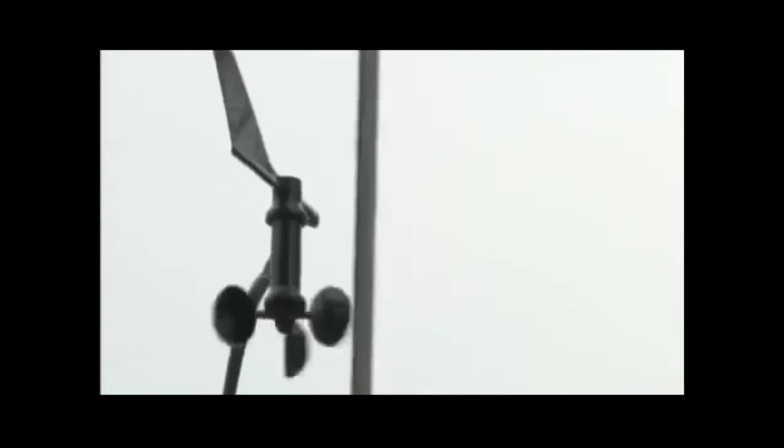Other factors further complicate the lifting process. Due to an increasingly tight schedule, the team is forced to conduct the lift during Singapore's annual monsoon season. It's almost impossible to predict when a tropical storm will hit. When it does, the accompanying lightning strikes can endanger lives. And because the whole operation takes place meters from a jam-packed highway, curious onlookers will be able to see any mistakes the engineers make. It's a potential public relations nightmare.

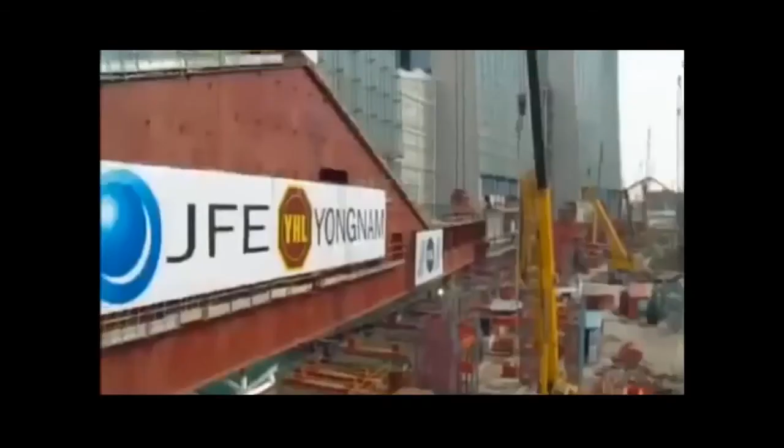Worst case scenario, we get stuck. And then we've got to figure out how to release it, how to continue lifting, because basically once we get going, we keep going. Okay, now I stop, huh?

During an estimated 16-hour lift, the box girders will move at a cautious 14 meters per hour. Eddie King and his team constantly check their weather gauges for any incoming storms. The hydraulic jacks are also inspected regularly for overheating. No one wants the operation to stall in mid-air.

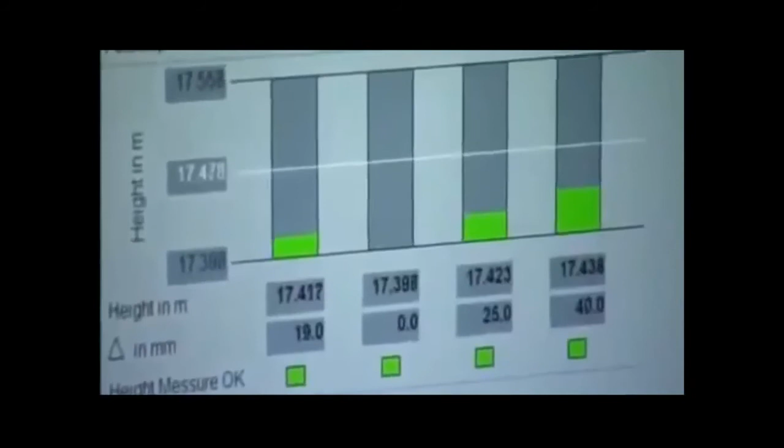Despite the team's best efforts, Mother Nature catches them by surprise. Okay guys, rain is coming. It's better we stop here. An approaching downpour threatens to grow into a lightning storm. We are at 200 meters above and the surrounding buildings are quite far away. So there's a chance of lightning striking on a high point like this. So we've got to stop and wait until the weather gets better before we continue our lift.

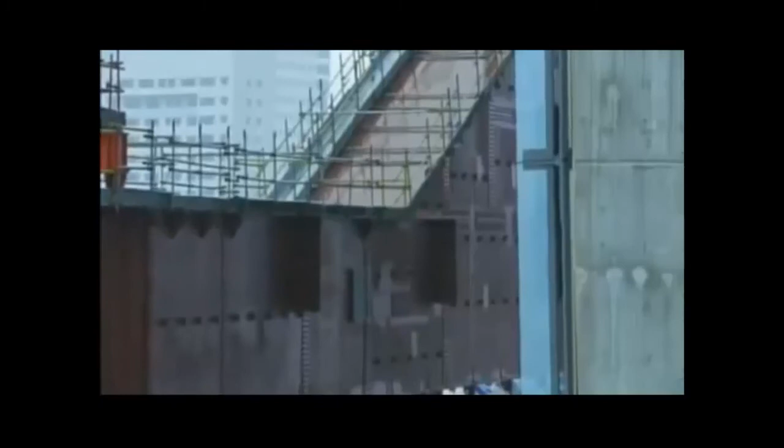McKee's worst fear comes true. If the girders remain stuck midway for too long, he will have to order them down. Okay. After a tense 3 hours, the lightning threat passes, and the operation cranks back to life. By the time the box girders slide into position, it's past midnight. Everything went quite smooth today, so we hope tomorrow we can do the same, smoothly bring it in and we'll transfer to the permanent position.

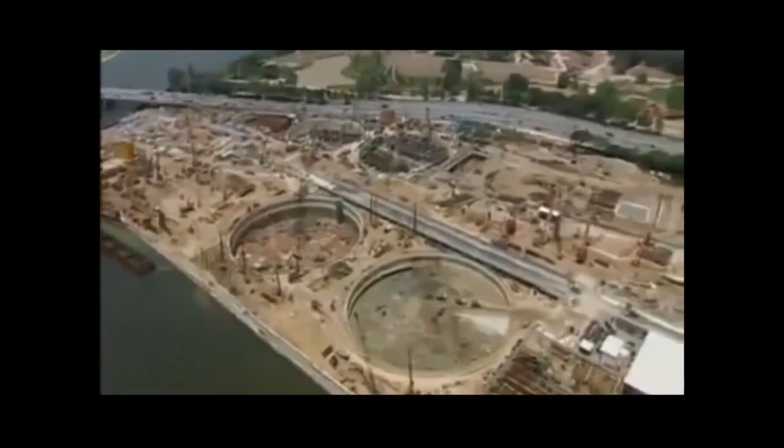With the lessons learned from the box girder lift, the rest of the segments go up smoothly. As the final piece rises into place, Singapore is already marveling at the team effort behind one of the world's most ambitious building projects. In just 3 years, engineers overcame seemingly impossible construction challenges, defeated marine clay, engineered ingenious design solutions, and survived the most debilitating financial crisis since the 1930s.

As the finishing touches are put on the resort, the stage is set for an opening party, Singapore style. Those involved reflect on the project that has already far surpassed their expectations. It's a bit overwhelming, you know. I'm in the process of disconnecting the umbilical cord. It's not easy for an architect. This type of project probably only comes around every 25 years or so. So it's been a lot of hard work, extremely challenging.

I really can't imagine, I couldn't list the number of challenges we've overcome along the way to get to today. Everybody is saying this is kind of a miracle, you know, never seen anything like it. And it's rewarding, it's nice. The Marina Bay Sands, Singapore. Proof that with visionary design and engineering know-how, megastructures can still defy the odds and fulfill the wildest dreams.